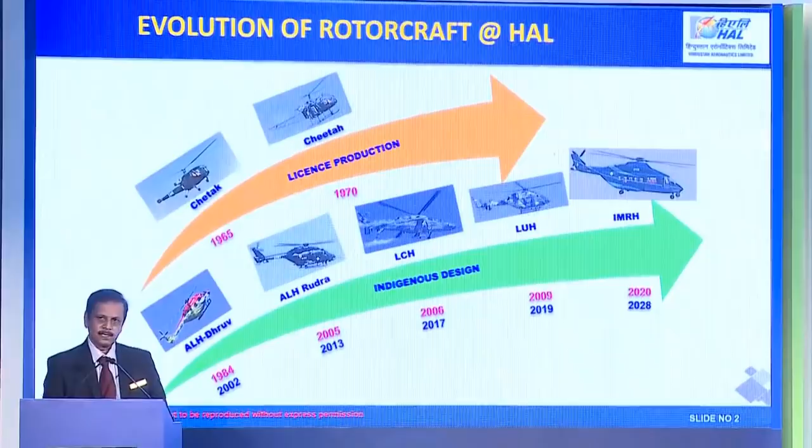Okay, I will start with a brief introduction about HAL's track record or history as far as rotary wing aircraft is concerned. Our beginnings were very humble. The license production of the Cheetah and Chetak helicopters, which were primarily of French origin. The Advanced Light Helicopter was the first project that was sanctioned by the Government of India, and which HAL has now successfully developed. We also have a weaponized version of the ALH, which is called the Rudra.

And from there we made the dedicated attack helicopter, which is the light combat helicopter. And then the next project was the light utility helicopter, which has recently been certified. And the next big step we are taking is the IMRH, which is the subject of our presentation. Next slide, please.

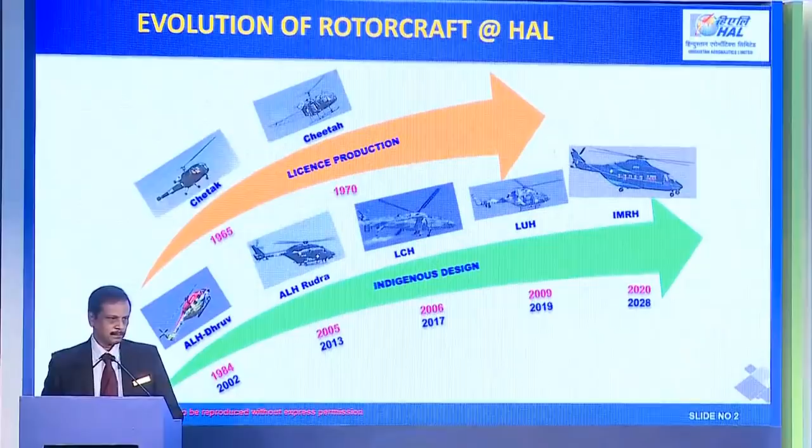Now, we will start with an assessment of what is the potential demand for these helicopters in the Indian Armed Forces, starting with the Air Force. Before that, a little caveat. This information is from the public domain, so we do not claim the authenticity of these numbers, but I think they are more or less reliable.

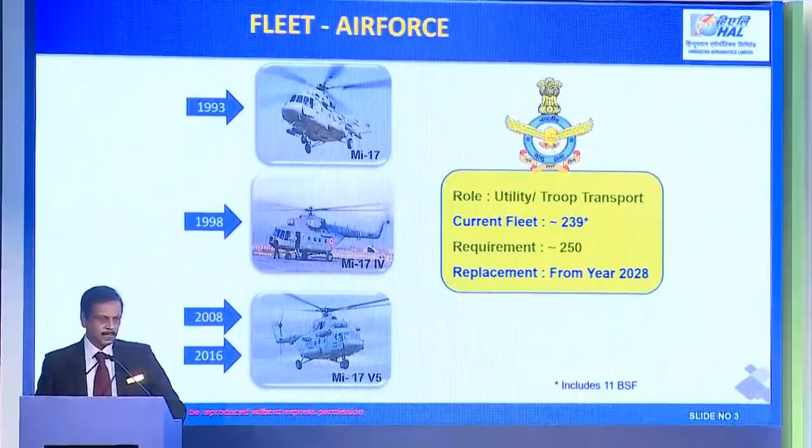So the Indian Air Force currently has a fleet of about 239 helicopters, and the estimated requirement is of the order of 250 starting from 2028. Next.

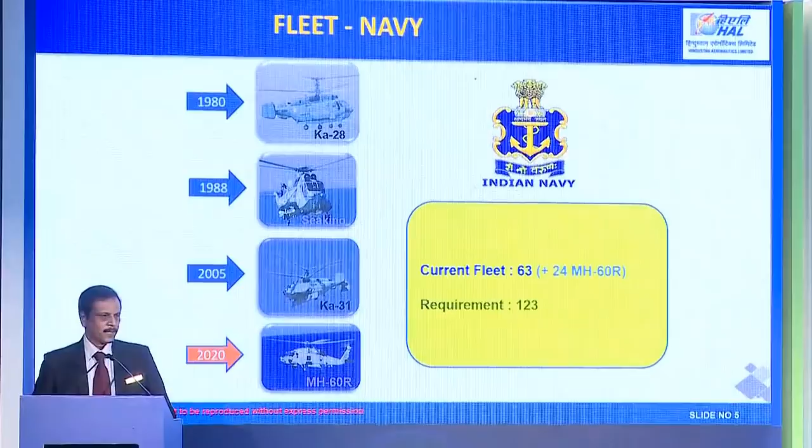Coming to the Indian Navy, they have a current fleet of 63, including the contracted 24 MH-60 Romeos, and the requirement projected is 123. Next.

So adding up these numbers and assuming some reasonable share for HAL out of these total numbers I showed you, we estimate that IMRH will have a total demand in India for the defense forces of the order of 314 helicopters. And the flyaway cost of these 314 helicopters will be approximately 78,500 crores.

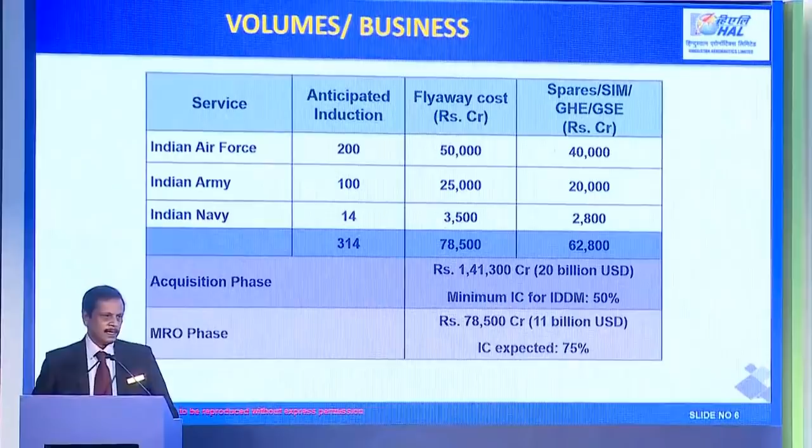And as you know, in any contract for such procurement, there will be an element of ground support equipment, simulators, and other supporting infrastructure for O-level, I-level maintenance, etc., which all added together is estimated to be around 62,800 crores. So we are looking at a total business of 1,41,000 crores during the induction of this helicopter, approximately 20 billion USD.

In addition, over the next maybe 30 to 40 years, these helicopters have to be supported in the field. And by making reasonable assumptions, we estimate that 78,500 crores will be the business volume during the MRO phase. Now, in the acquisition phase, you know that as per the new DAP 2020, 50% indigenous content is mandatory for a product to be classified as IDDM, indigenously designed, developed and manufactured.

So out of this 1,41,300 crores, 50% is mandatorily to be the value addition within India, which will be something like 70,000 crores. And depending on how much of that will be outsourced by HAL to the private industry, which I assume may be of the order of 50%, we are talking about a 35,000 crore business opportunity for the Indian private sector here.

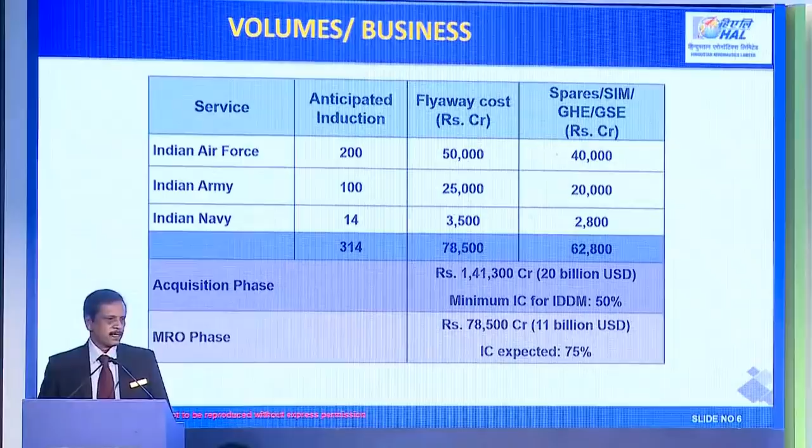And we expect during the MRO phase, we will have more indigenous content. It will be of the order of 75%. So that's again a huge business opportunity, and it's a long-term thing. This market belongs to people who are in it for the long term, not some people looking for quick profits. Next slide, please.

Now, as I told earlier, we are not only targeting the Indian market. As per the interest shown by the ministry and the directives, we have to design this helicopter with the global market in mind. And for us, this is a serious intent. It is not just a slogan or a catchphrase. We are seriously benchmarking our helicopter with whatever is available in the world.

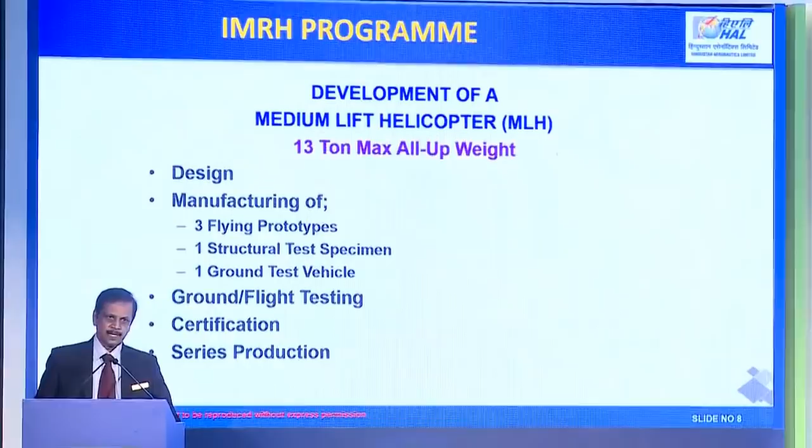The program, in short, has the elements which are listed here. Primarily the design, most of which will be done by the Rotary Wing Research and Design Center of HAL in Bangalore. Next is the development phase, where we have to manufacture basically 3 flying prototypes, one structural test specimen for destructive testing, and one ground test vehicle, which will be the test bed for most of the systems before the first flight of the prototypes.

This will be followed by possibly 3 to 4 years of ground and flight testing to certify all the systems. And the certification is expected in about 7 years from the date of sanction. Sanction is awaited. We expect that maybe within a year or year and a half, we will have a government sanction in place. And the certification, of course, will be followed by the series production of these 300 and odd helicopters I mentioned. Next, please.

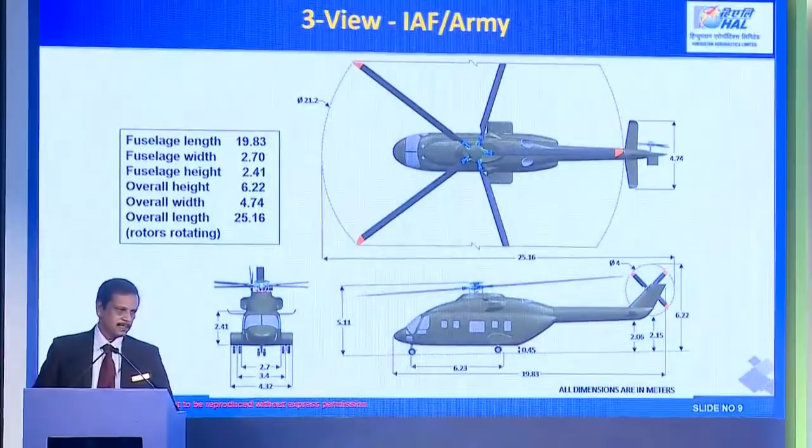This is again, as I told you, the first time we are opening up some details of this helicopter to the general public. So if you see the broad dimensions of the helicopter, the rotor diameter is 21.2 meters, tail rotor diameter is 4 meters. A little later on, I will give you further inner details of this aircraft. Next one, please.

This is a 3D digital model. HAL has been working on it from approximately 2017, so we have now done work for more than 3 years. And we now have a 3D digital mock-up of the helicopter with all the LRUs, equipment, including antennas, located and positioned in the aircraft. Whatever changes are required when the final requirements are issued by the armed forces, we will make those minor changes.

But our earlier predictions or estimations of what could be the requirements from the armed forces are matching with a draft version of the requirements which we have studied recently. So we don't anticipate any big surprises. We are well prepared with our design. Next, please. We have made a small walkthrough of the helicopter, so I would request this video to be run.

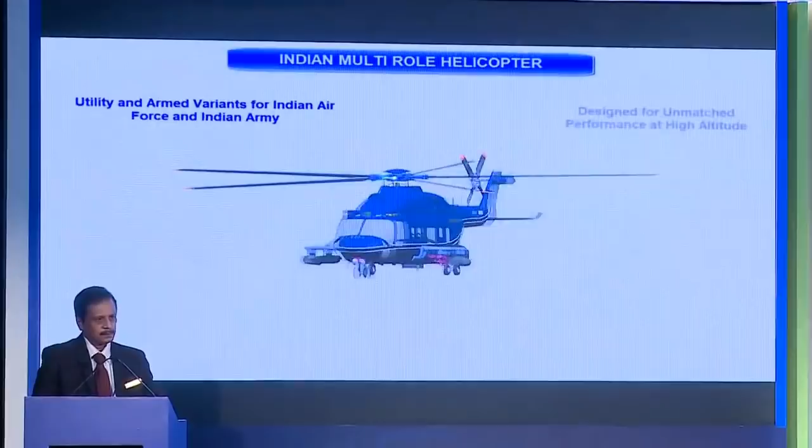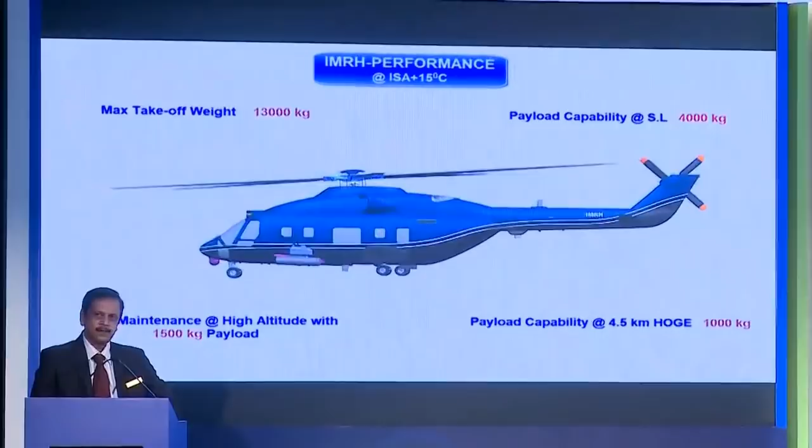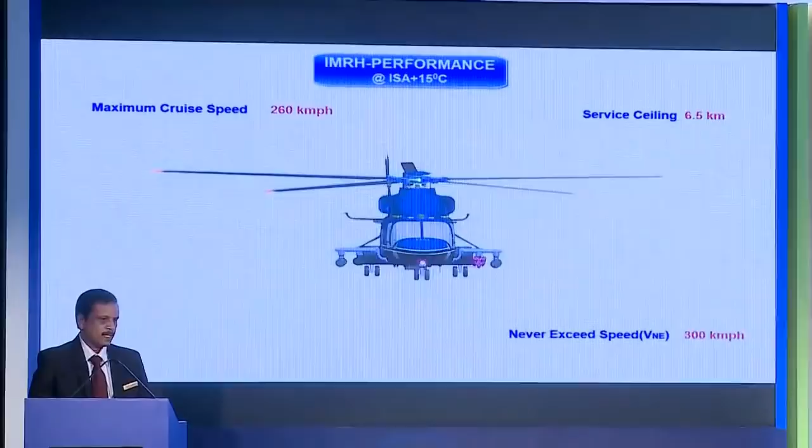So the aircraft has multi-mission, multi-role capability in a true sense: 4,000 kg payload at sea level and maximum takeoff weight of 13 tons. At an altitude of 4.5 kilometers, the payload is 1,000, which I don't think any helicopter in the world today can offer. Service ceiling is 6.5 kilometers. Maximum speed is 260 at ISA plus 15 degrees centigrade conditions.

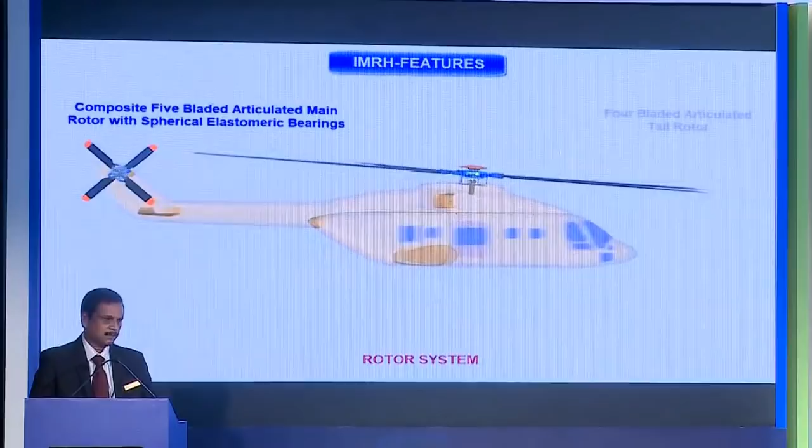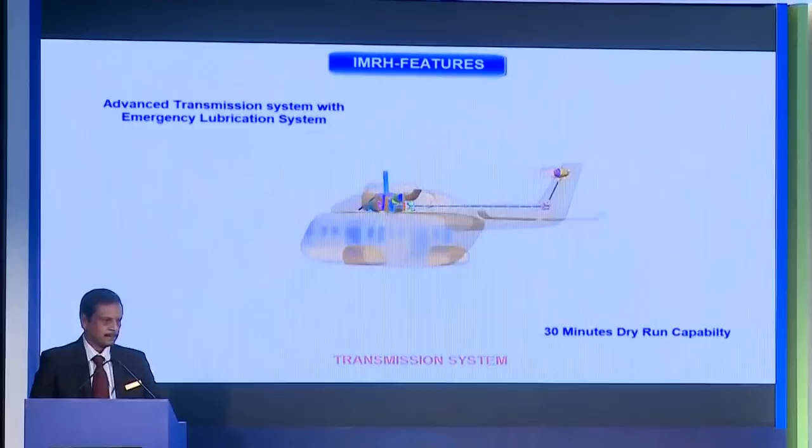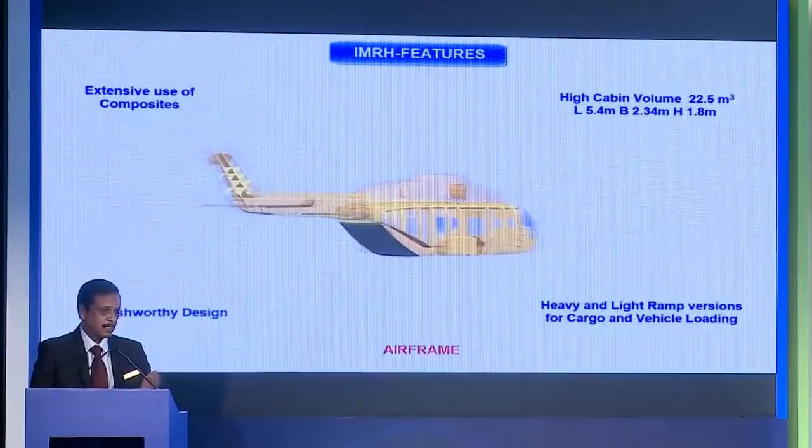We have a composite rotor system. Transmission is 100% HAL design. The engines, of course, will be from foreign OEMs; we have 2 OEMs with whom we are discussing. The airframe is primarily made of composites with main frames being metallic. The landing gear is again HAL design. It's a crash-worthy landing gear meeting international crashworthiness standards.

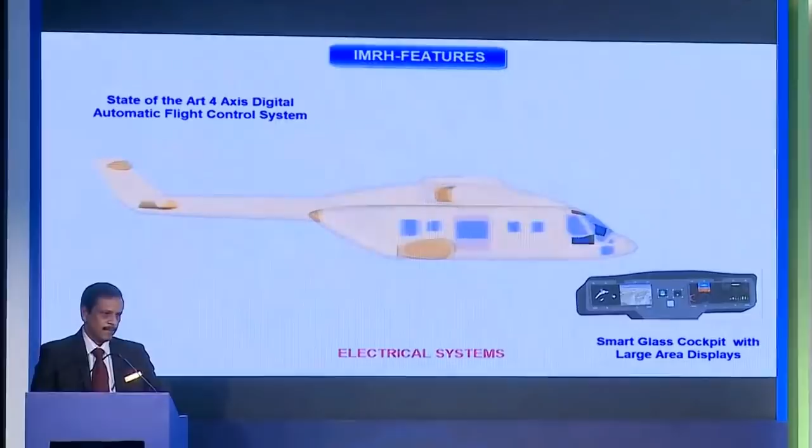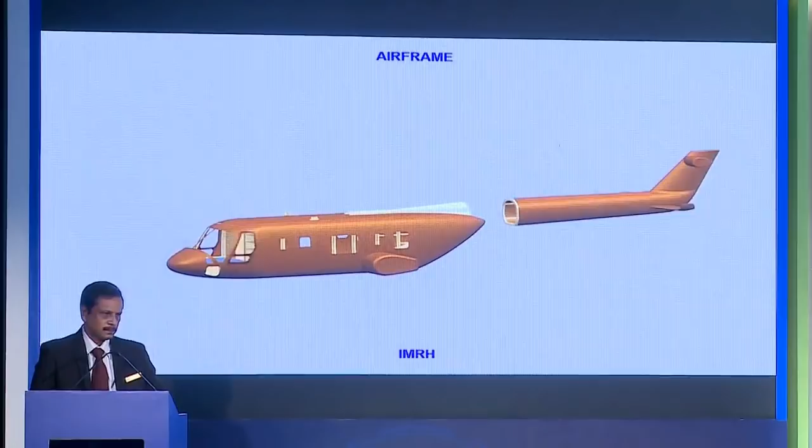We have a smart cockpit with large area displays. And the airframe is designed in a modular fashion. This is one area where we are looking forward to private sector participation in making the airframe for the IMRH.

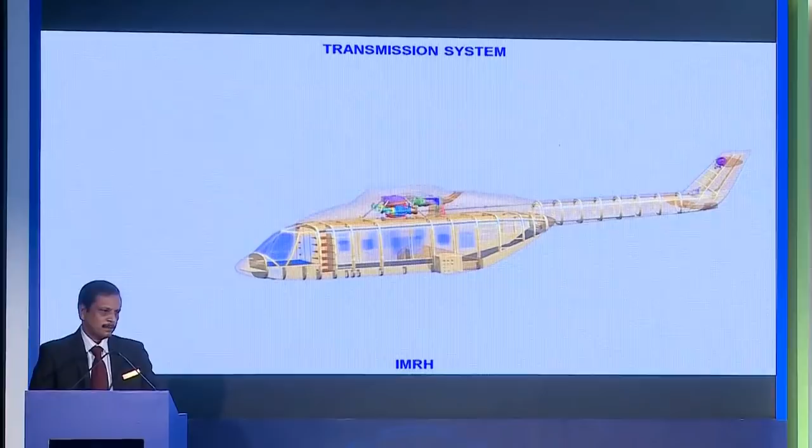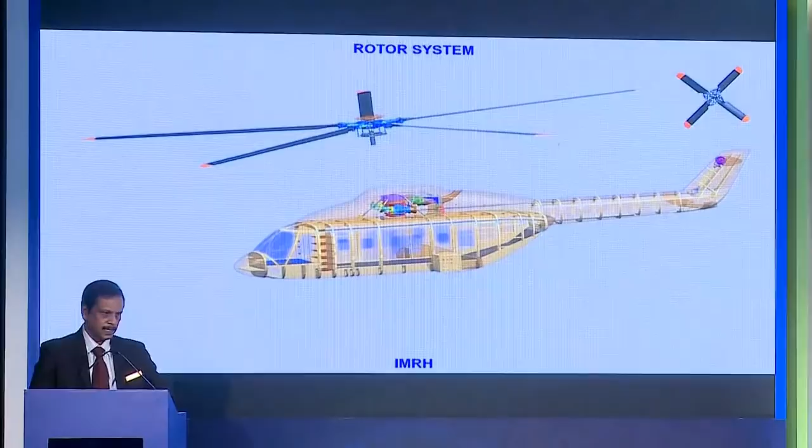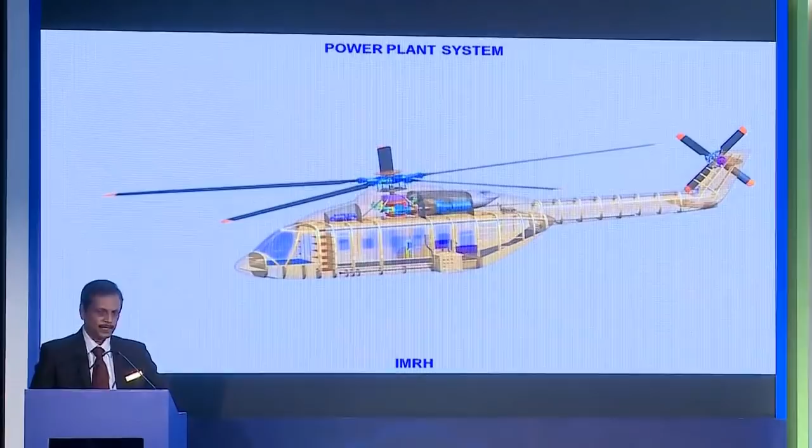These are some details of the transmission system design. As you can see, we have gone quite well ahead in the design. These are not just graphics, these are actually the correct gear ratios, etc., which have been decided. We have also provided for folding of the blades. Although it is not there in our requirements from the Army and Air Force side, for parking efficiently in underground hangars, etc., we are providing a folding facility.

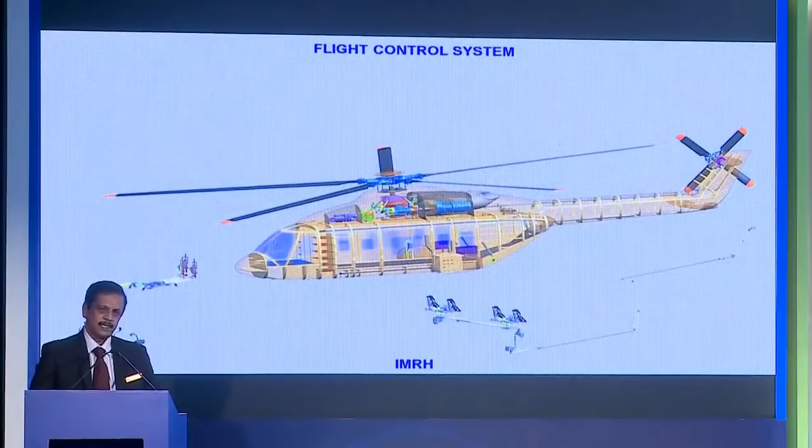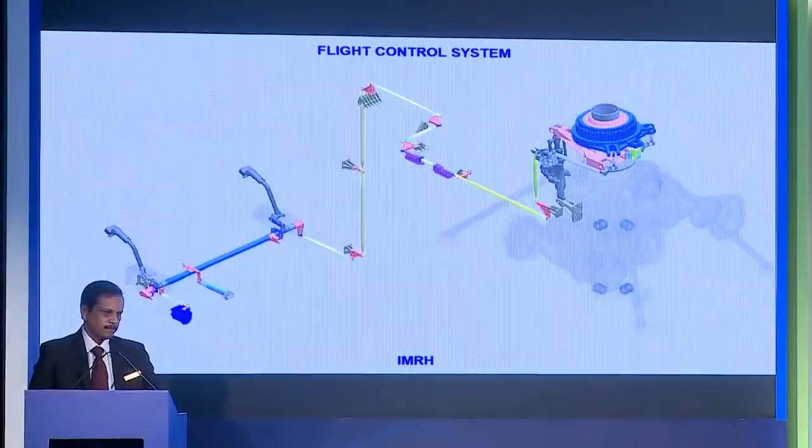The other systems in the aircraft, like hydraulic systems and flight control systems, all of these layouts we have completed. And in most cases, we know who the potential vendors are for all the LRUs that are required. The flight control system.

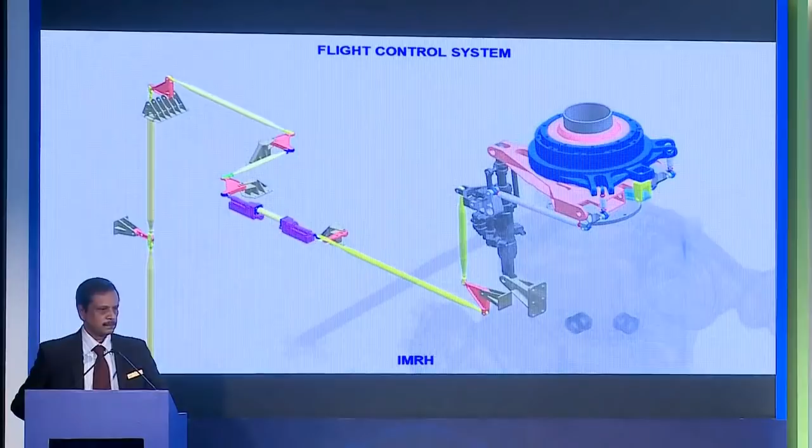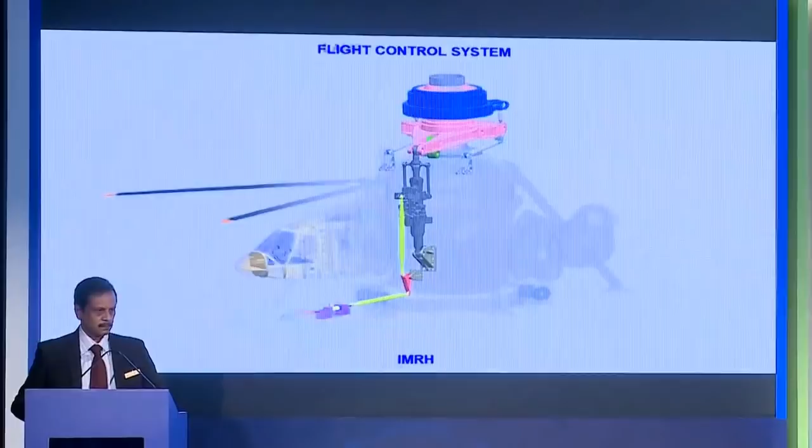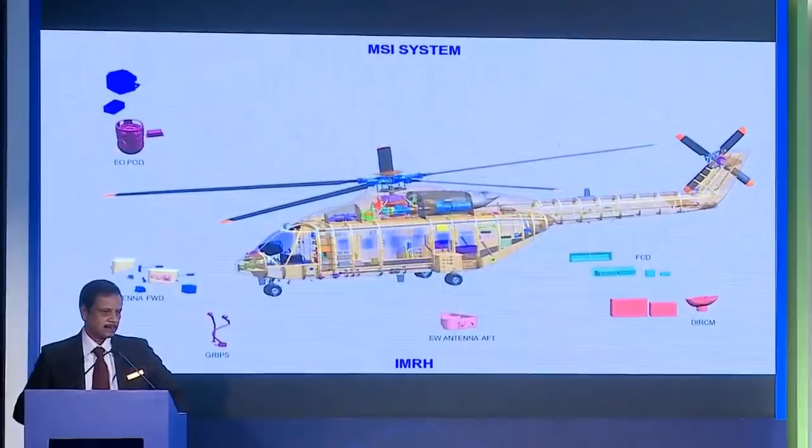The avionics system, this will be state of the art and maybe the best in the world today. The mission systems which are there as part of the helicopter. And the general mechanical systems like the air conditioning system, for example.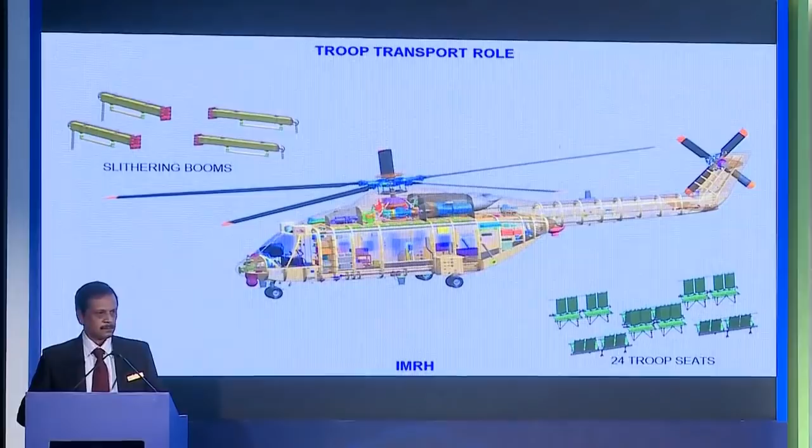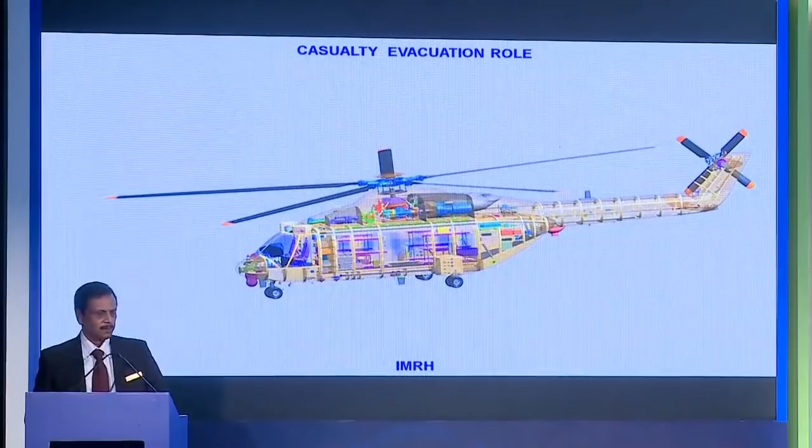So basically it's a cargo helicopter with troop transport, tactical troop transport capabilities, but in the weaponized form it is a lethal platform for attack. It will also have a self-defense suite of products.

We can drive certain vehicles used by the army, for example, directly into the cabin. There is a ramp door designed for that purpose. And we have the biggest cabin volume available in this class of helicopters.

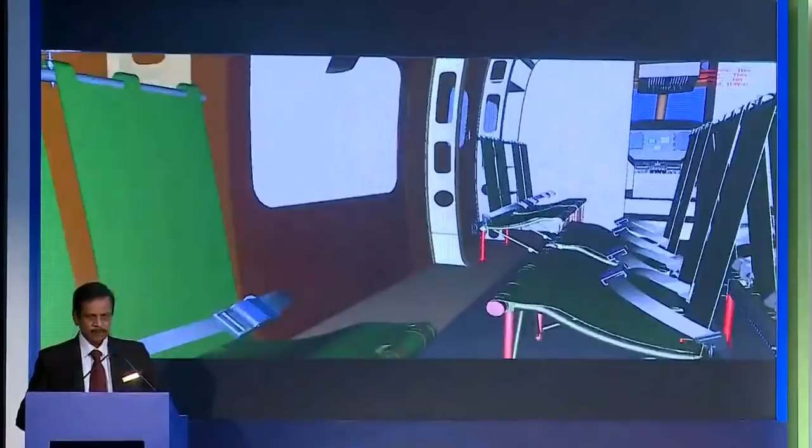So in the armed role, of course, there is an armament boom on which 4 stations will be available, with a total of 1,600 kgs of weapon load possible. This is a perspective view of the cabin from the inside. This is a cockpit console and the displays, the large area displays which we envisage.

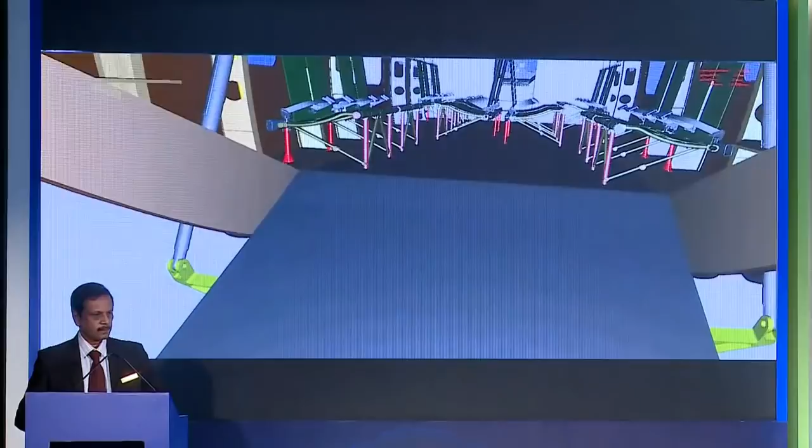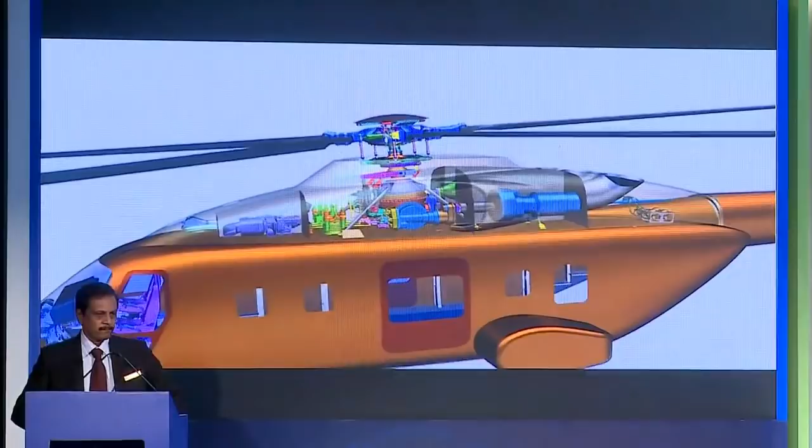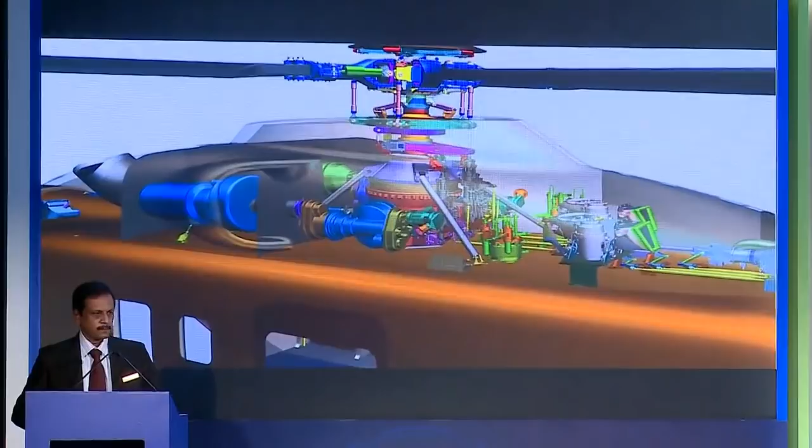So there you can see that most of the items are already modeled, positioned inside the helicopter. So this is the IMRH walkthrough. Can we go to the next slide, please?

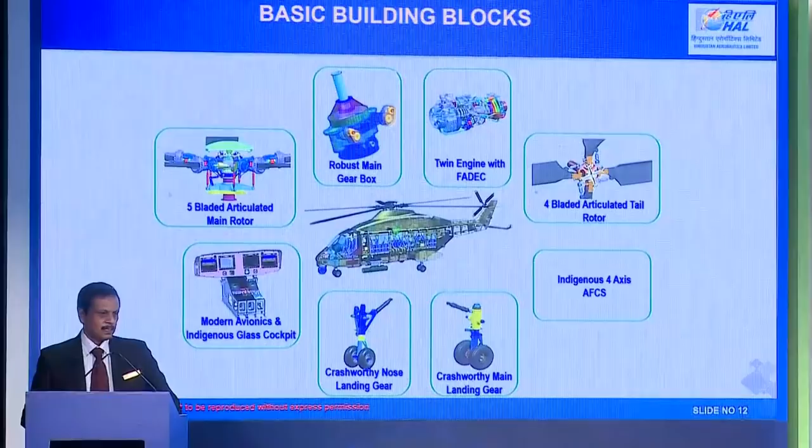Coming to the basic building blocks, as I told you, the most critical systems like the rotor system, transmission system, landing gear, displays, automatic flight control system. For all these we have made very good progress, and we are very clear about our task. So the definition of most of these systems is at a very advanced stage. Next, please.

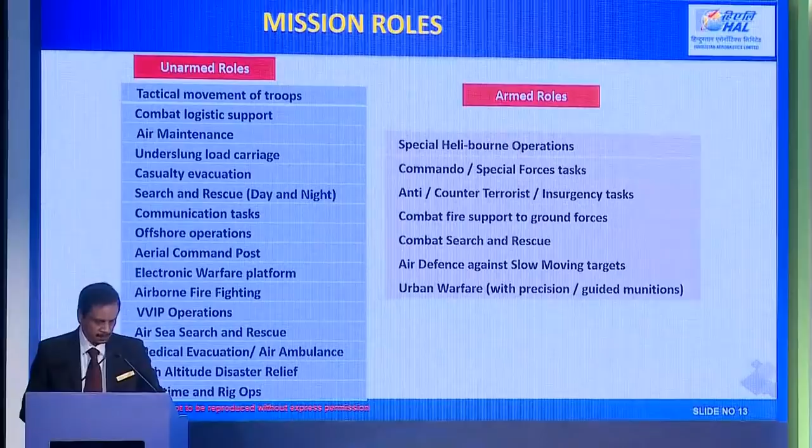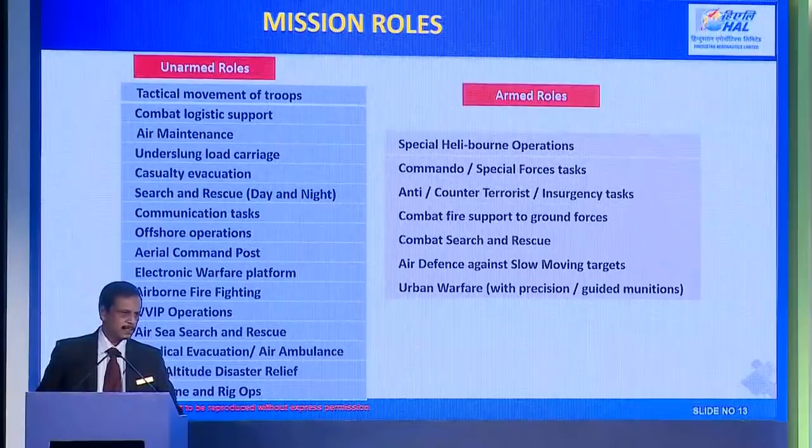On the right hand side, the armed roles, you have special heliborne operations, the commando special forces tasks, anti-insurgency or counter-insurgency operations, and fire support to ground troops, combat search and rescue, then air defense against UAVs, and then urban warfare. These are the armed roles as per the requirements of the customers. Next, please.

These are the broad specifications of the aircraft. Of course, certain of those specifications we have not brought here because they are sensitive in nature. But these are the kind of specs normally you will find in Wikipedia or such generic sources. The all-up weight of the helicopter is 13 tons, as I told earlier. But in certain missions, we will permit a maximum takeoff weight of 14.2 tons.

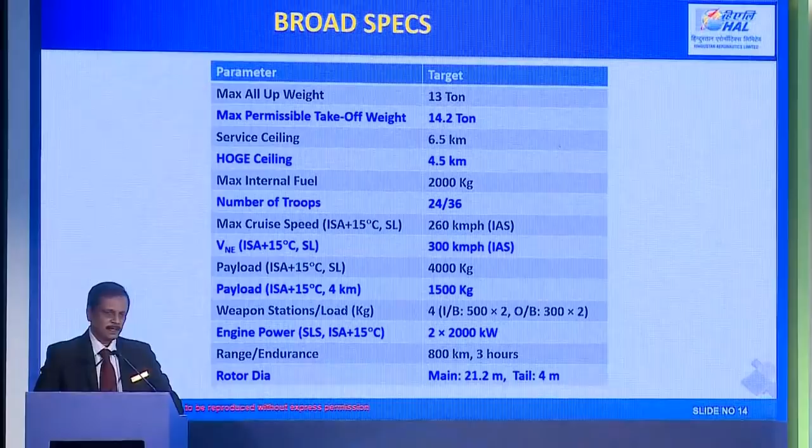The service ceiling is 6.5 kilometers, and the hover out of ground effect ceiling is 4.5 kilometers, which I think none of the contenders I mentioned earlier, globally, have this capability. We can carry internal fuel to the extent of 2,000 kgs, which gives an endurance of about 3 hours plus.

We can carry 24 troops in the default configuration and 36 in the high density seating configuration. The max cruise speed at ISA plus 15 condition is 260 kmph. This is indicated airspeed. The payload at sea level is 4,000 kg. Of course, the Mi-17 also can carry 4,000 kg at sea level, but the range we are offering is at least 25% better than what the Mi-17 can offer.

And then, as I told you, there are 4 weapon stations, and the inboard stations are of 500 kg each, and the outboard stations can carry 300 kgs of armaments. The range is 800 kilometers at sea level. Rotor diameter is 21.2, which matches with the Mi-17.

And this is a fairly large rotor diameter because we have very special requirements to operate at very high altitudes. So this rotor diameter is one of the key requirements for that. Similarly, for the tail rotor, we have chosen a 4-meter diameter, which is higher than that of the Mi-17, because again, our high altitude requirements are very unique and we don't want to fall short in any requirements at all. Next slide, please.

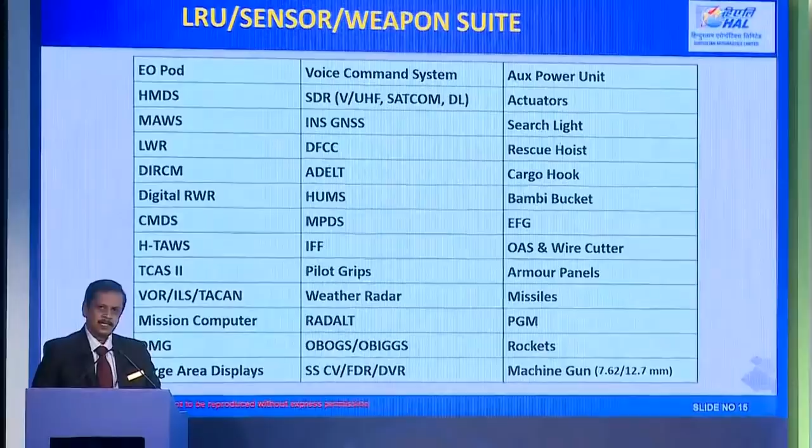This is the set of line replaceable units or equipment, sensors and the weapons which are going to be part of the helicopter. The electro-optical pod, the helmet-mounted display system, missile approach warning system, laser warning receiver, then directed infrared countermeasures, the radar warning receiver, etc. These are all fairly standard equipment in most of the helicopters.

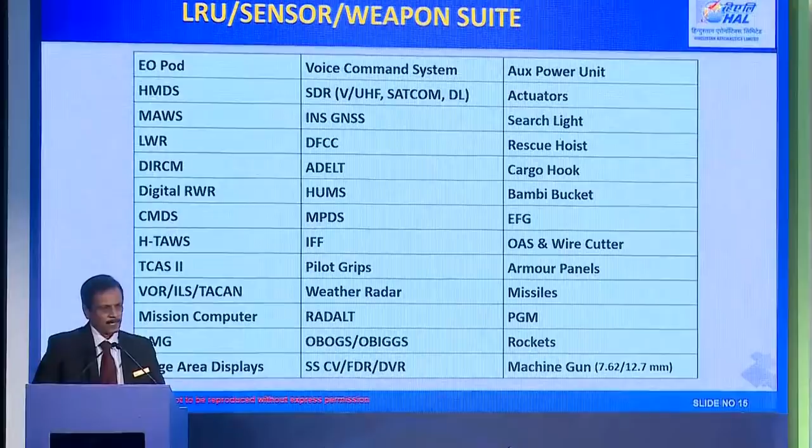Now, the idea of presenting it here is to give a perspective to the industry about how can they participate in this program. Some of these equipment here, especially the navigation, etc., our HAL divisions themselves are making. But certain critical sensors, like for example the DIRCM or the missile approach warning system, etc., are supplied by global vendors. And as all of you must be aware, we have now a Make in India purchase preference policy, which is promulgated by the Government of India,

according to which you have to either qualify as a class 1 local vendor or as a class 2 local vendor to be eligible to participate in these tenders. Of course, you can respond to our tenders as a global OEM, but because of this purchase preference policy, the Indian vendors who meet this criteria of value addition, which is 50%, they can be given preference. So therefore, as a strategy to those OEMs, our suggestion will be to set up companies in India with the requirements specified by the government as far as definition of an Indian company is concerned.

And if you can show a value addition of at least 25-30% in India, you stand a very good chance of winning the orders from HAL for these helicopters. This is a changed scenario where earlier we could freely issue global tenders and then select the equipment. So what I am suggesting is that those who set up companies in India today stand a better chance of winning these contracts.

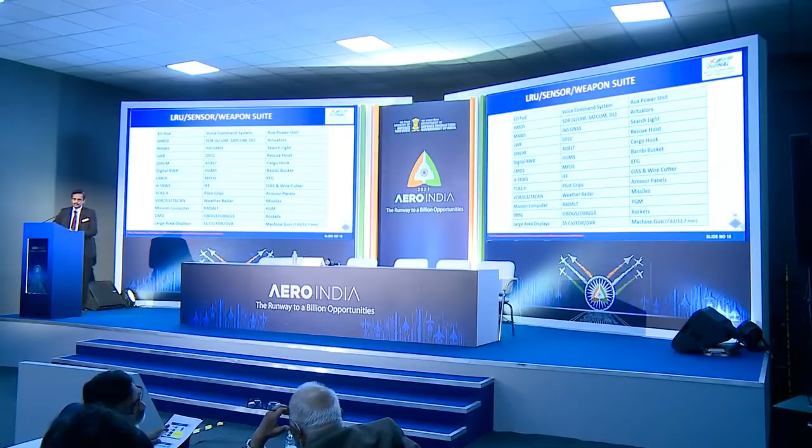And you can either set up companies or you can take Indian companies including BEL or HAL as your partners and make this equipment in India. So a lot of opportunities are there for everyone in this. Next slide, please.

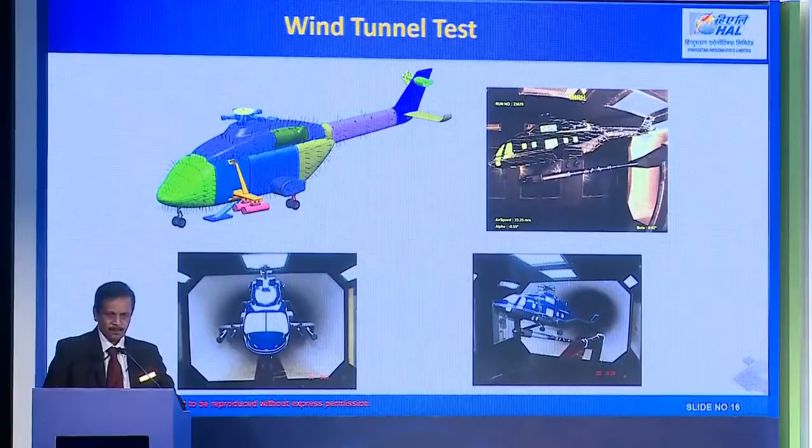We have already completed phase 1 of the wind tunnel tests of the helicopter, and the results so far are very encouraging. The observed drag values of the helicopter are better than what we have estimated; in other words, the performance can be better than what we have shown here, but we will confirm it only after flight testing starts. The wind tunnel model itself is made in a modular fashion. You can see a lot of external appendages are there, so that we can test them in combinations and then assess what are the aerodynamic characteristics. So we get more information about the flight characteristics of the aircraft. Next, please.

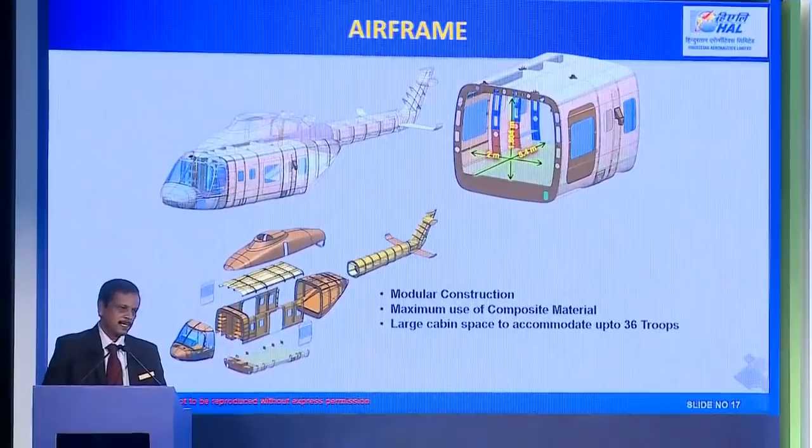This is the airframe. Broadly, the modules we have envisaged in the airframe. This is again an area where the private industry can participate. In the projects like LCA, we have started involving the private sector only in the production stage. However, in this case, we would welcome private participation right at the design stage itself, so that the vendors who take up manufacture of these modules in the development stage can continue to become the suppliers in the production stage

as well, so that the learning that is involved in perfecting the manufacturing of such components and assemblies can run concurrently with the development phase, so that when the production comes, this private ecosystem will be well equipped to supply parts and assemblies to us. And we would welcome if major fuselage modules are supplied as it is. And we are also open to models where the private sector, those who are capable, can also take up the detailed design of parts based on the geometry defined by HAL and supervision of HAL. Next, please.

This is a broad overview of the rotor system. It's a bit technical. HAL people present here anyway know all these details, and for general public, it is a little overhead. I will not enter into the details, but this is just to show that we have done serious work on these designs and more or less come up with all the kinematics, sizing of the components, stress analysis. All of this has been already completed. Next, please.

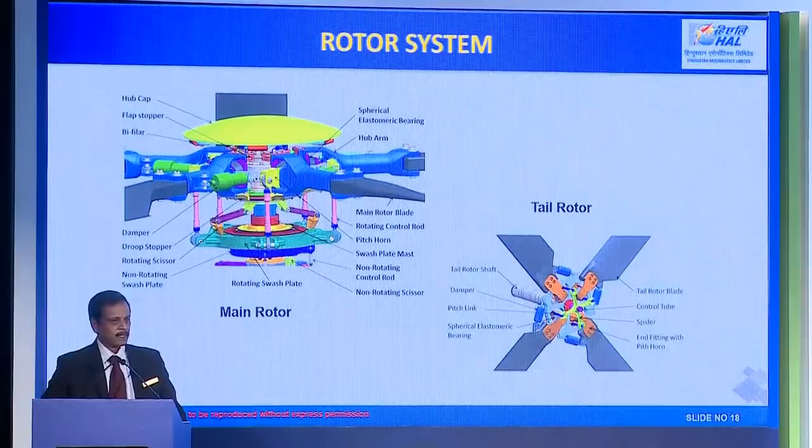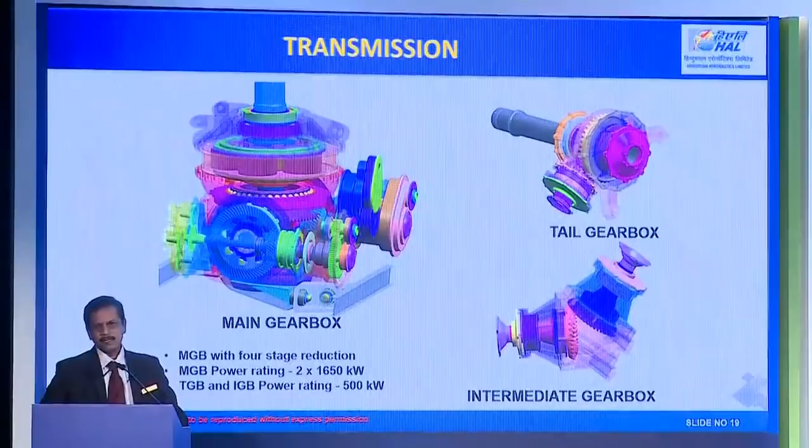This is again some views of the transmission system. The whole transmission system weighs 1 ton. So it's a huge thing. Here again, I know there are private companies in India who can do the gear machining and the MGB, the main gearbox casing, which is again a casting. So the forging of the gears or cutting, machining, gear cutting, these are all the areas where the private sector can participate.

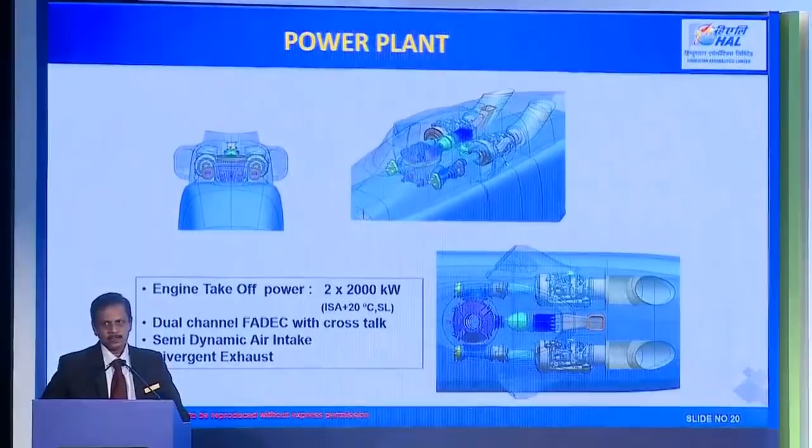Next. The engines, of course, as I told you, they will come from foreign OEMs, because right now in India there are no engines available of this order. We need actually approximately 2000 kilowatts from each engine, and we use 2 engines in this helicopter. Next, please.

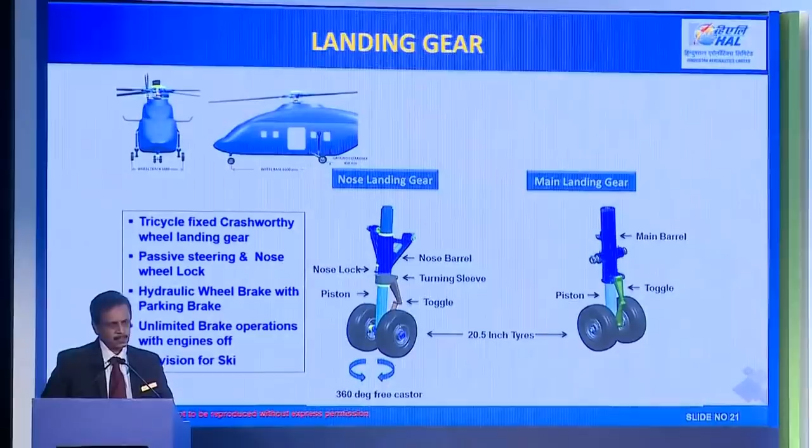So this is a tricycle landing gear. As of today, it is not retractable because the Army and Air Force are not interested in a retractable landing gear, but in parallel we have kept a design ready for a retractable version as well. It has got the regular features like parking, brakes, steering, passive steering, etc. And it is crash worthy to the extent of 6.1 meter per second vertical sink rate, which meets the international standard for crash worthiness. Next, please.

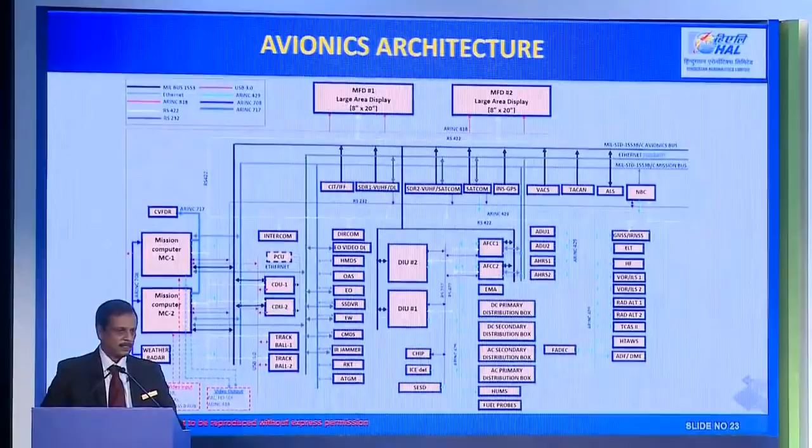This is the overall avionic architecture of the helicopter. At the architectural level, we have finished with our conceptualization, and some fine-tuning will be required in view of the new requirements which Air Force has projected. Otherwise, we are through with it. The next stage, of course, is to define all the ICDs, intercommunication between all these equipment you see on the screen.

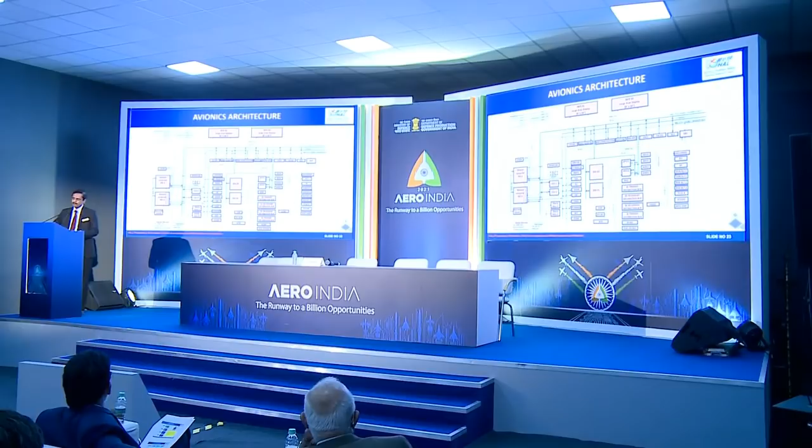The software development for this is one of the challenging tasks in the IMRH. Once again, we would welcome companies who are experienced in the field of developing software for aeronautical applications. We can work out certain partnerships where certain elements of the software can be developed by the private sector, and HAL of course will do the total integration, and the software architecture will be defined by HAL, based on which the private sector can participate and contribute.

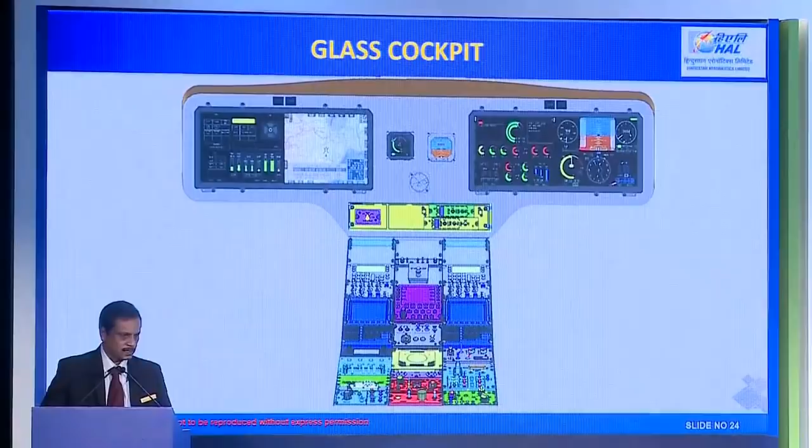Next please. This is a general view of the cockpit, how it will look like with the two large area displays and the central console packed with switches and other kinds of knobs and controls, etc.

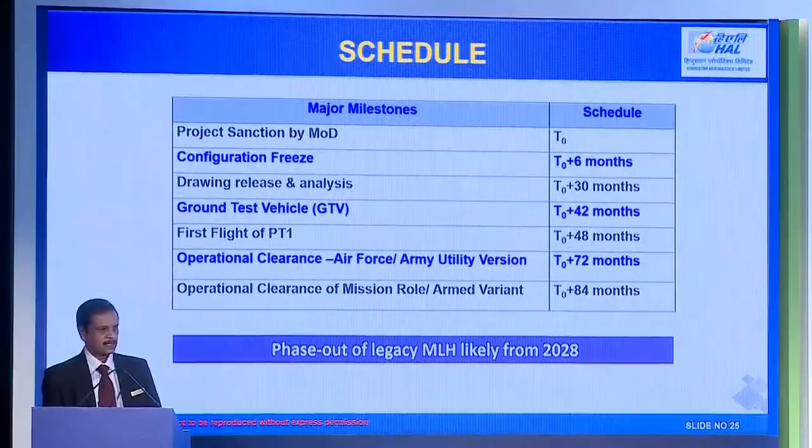Next please. As far as schedule is concerned, as I told you earlier, it's about 7 years what we are targeting. This 3.5 years of advanced work what we have already completed is going to help us in meeting this schedule. And as you would have already understood from my presentation, we have done quite a lot of serious work, and therefore we are well prepared to start sprinting the moment the government sanction is available.

And as I told you, Mi-17s are going to be phased out from 2028. So if this project is started in 2021, we are exactly dovetailed with the phase out of the Mi-17, and we will be ideally positioned to cater to the demand. Next. There is a small movie to wind up the presentation.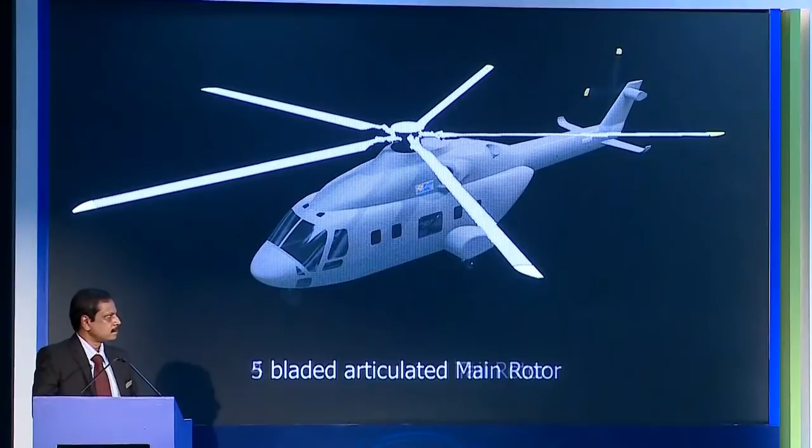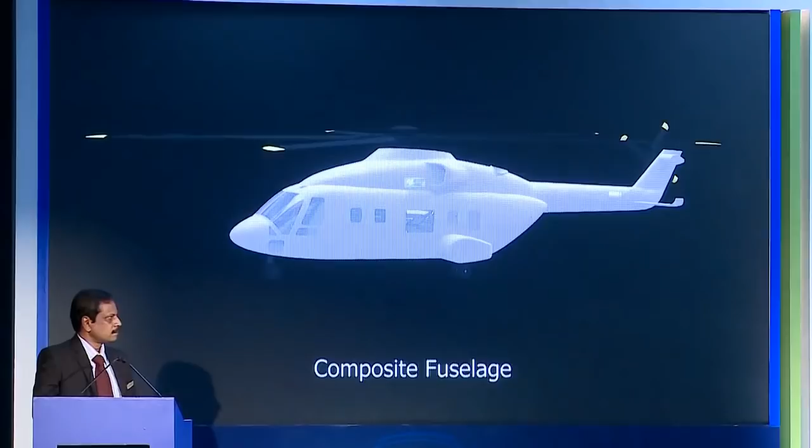Rotary Wing Research and Design Center of Hindustan Aeronautics Limited has launched the design and development studies of Indian multi-role helicopter IMRH, indigenously designed to meet the requirements of Indian Armed Forces. IMRH is a 13-ton class medium lift helicopter featuring 5-bladed articulated main rotor with spherical elastomeric bearings and composite blades, 4-bladed articulated tail rotor with composite blades, advanced transmission system with emergency lubrication system, composite fuselage, glass cockpit with advanced avionics, dual-channel AFCS, crash-worthy design, self-sealing fuel tanks, twin engine with dual-channel FADEC and APU.

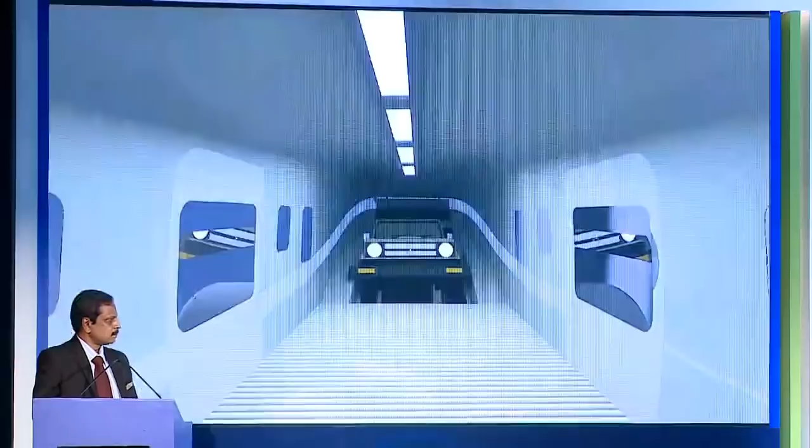Large cabin volume comprising of increased height, width and length as compared to any helicopter of this class. IMRH is capable of carrying 24 to 36 troops with ease of ingress and egress of men and material. Designed to operate from sea level to 6.5 km pressure altitude with high payload capability, IMRH will meet the mission requirements of Indian Armed Forces and will have Army and Air Force version, Navy version, Civil version, VIP and VVIP variants. IMRH is best suited for all weather conditions and a multi-role helicopter with quick role changes, equipped with sophisticated systems for counter-insurgency operations, troop support, search and rescue, disaster relief, and medevac operations.

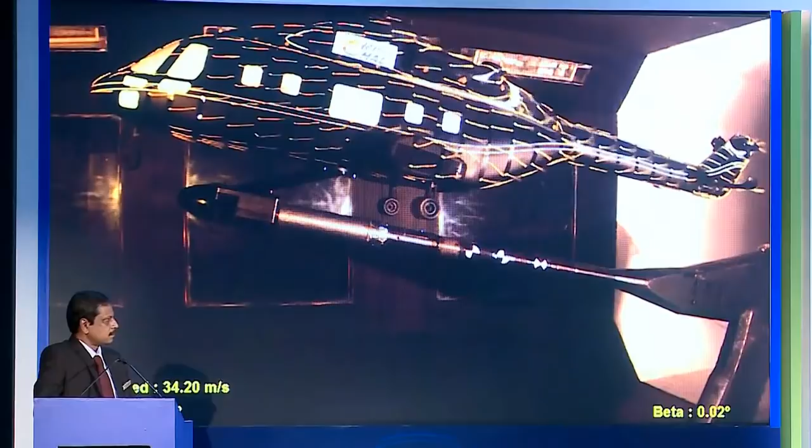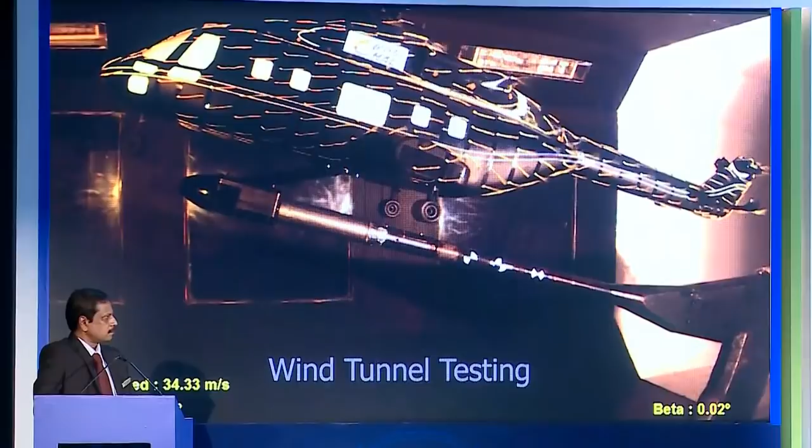HAL has completed the preliminary design studies and wind tunnel test of 1:10 scale model of IMRH. The IMRH meets requirement of Indian Armed Forces at extreme altitude and weather conditions. The civil variant of IMRH will be designed for superior luxury and comfort. Indian multi-role helicopter is the next generation indigenous product after Dhruv, Rudra, LCH and LUH from the stables of HAL.

So that brings us to the end of the presentation.